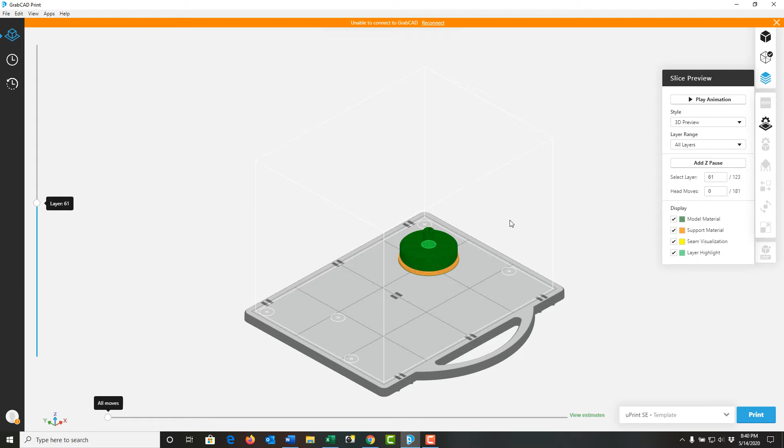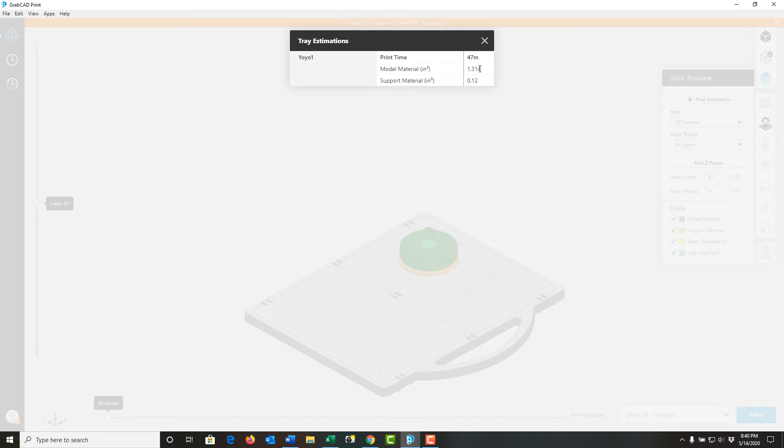To print one part with this orientation will take 47 minutes. Use 1.314 of model material, and we would expect the model material regardless of orientation to remain the same. And in this orientation we use 0.12 cubic inches of support. So I'll close this and I'll stop the layer preview.

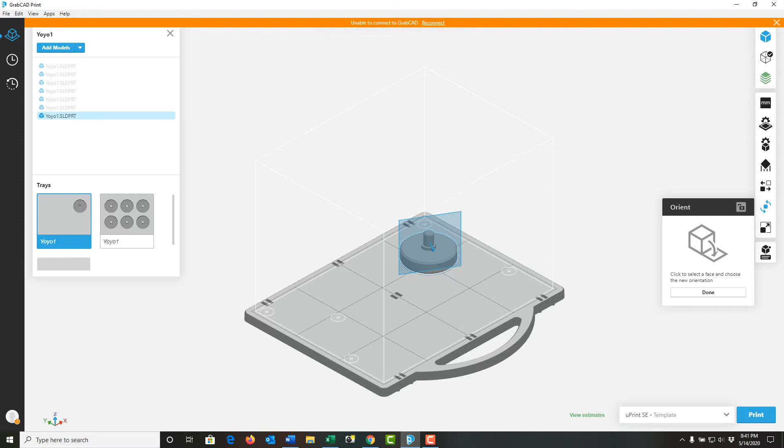And now we want to look at different ways to orient the part. So I'm going to select the orientation and I'll select my part, and next I'm going to tell it to orient a face to the plane. So I'll select this option, and as I move over the part you'll notice how the plane changes. So first I'm just going to select this face and flip the part upside down. So I'm going to tell it the selected face and plane will become the bottom. Next I'll tell it I'm done.

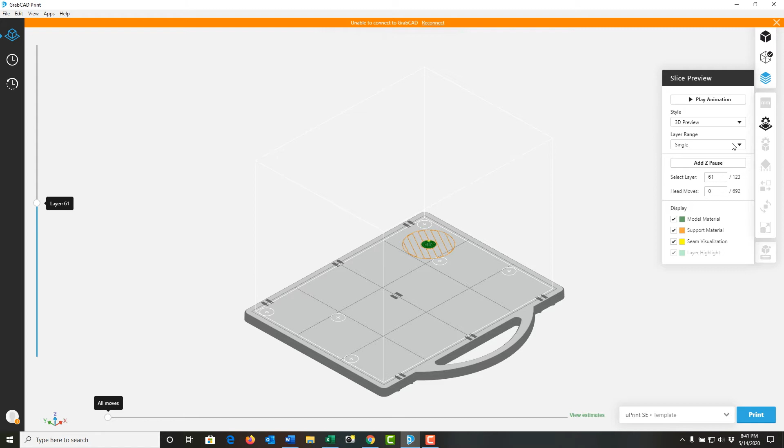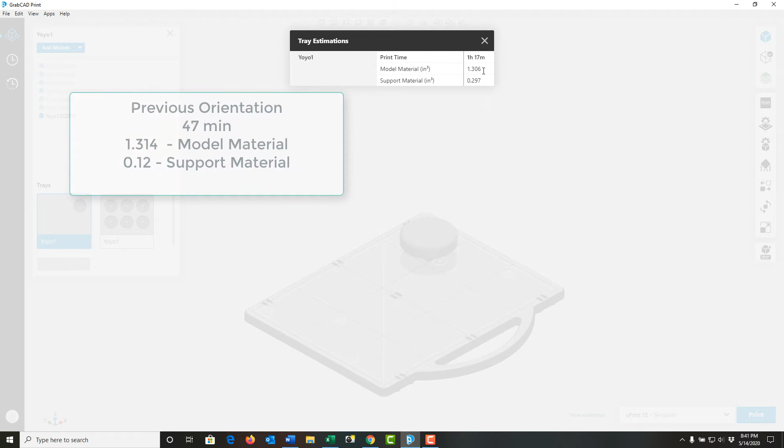And again, I'm going to slice this. Again, we'll look at all the layers. So we can see all the support here, and we can also see how it tapers out as it builds up to the bottom. We can turn the slice preview off. And again, let's look at the estimate. So now it's become 1 hour and 17 minutes. Uses 1.306 of model material and has 0.297 support. I'll close this.

And we'll continue to look at a few orientation options here. So I'll go back to Orient. I'll select my part. So again, I can reset the orientation to what it was. I can tell it to auto orient, or I can orient a face to the plane.

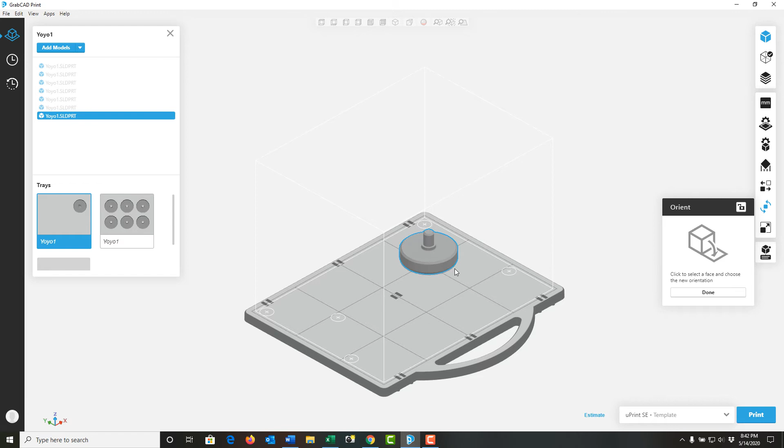So I can come out here and I can say orient that face to the front plane, and all it does is rotate it. Or if I come out here and select that again and orient that to the top, then the part is set this way. Just rotate around here by holding my right mouse button, and so now I can see the orientation. I'm going to accept that. I'll shut off the orientation, and once again I'll slice it.

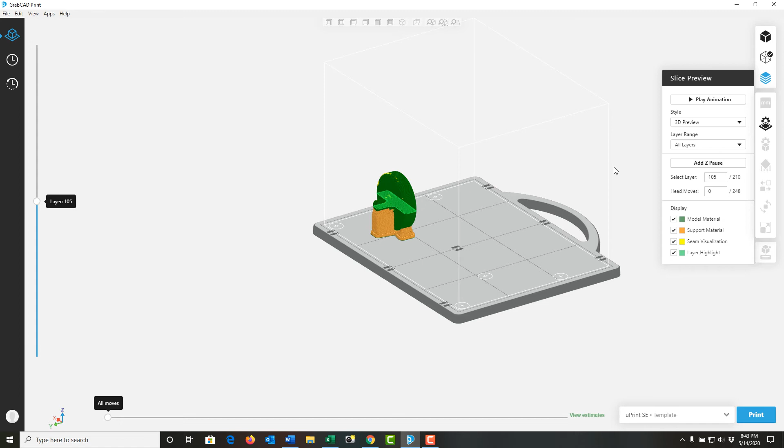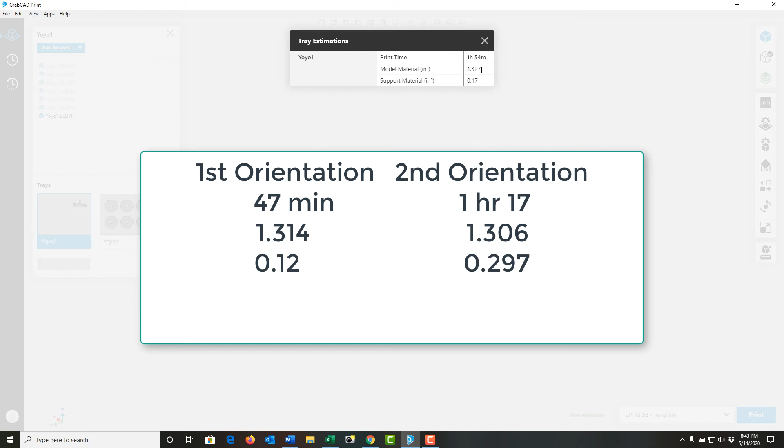And again I'll look at all of the layers, and here we can see the support. I'm going to turn off the slice preview, and again let's look at our estimate this time. So now the part will take 1 hour and 54 minutes, uses 1.327 cubic inches of material and 0.17 cubic inches of support. I'm going to close this, and I'm going to go back to the orientation options.

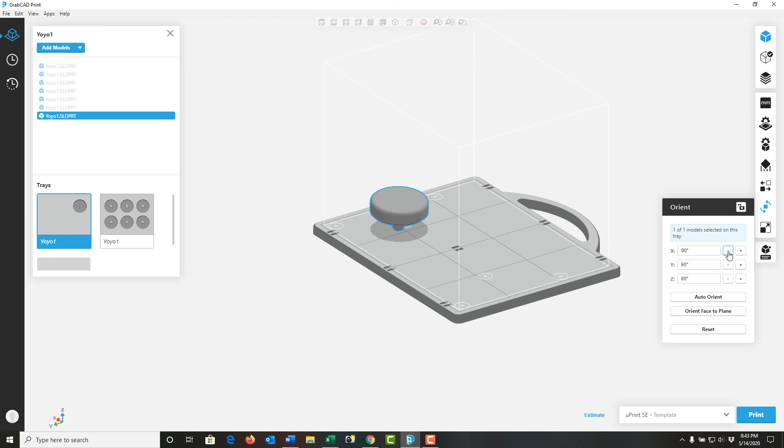Once again I'm going to select my part. The other way I can orient it is I can set an angular increment here. So I can rotate it about the X, and here we see our triad. So if I tell it to rotate in the negative direction around the X, this will happen. This will be the positive. Or I could do it about the Y.

I can also change the increment. So if I put in 45 degrees, we can see the effect. And I can rotate it about the Z. So with it rotated this way, I'm going to save that, and I'm going to slice it.

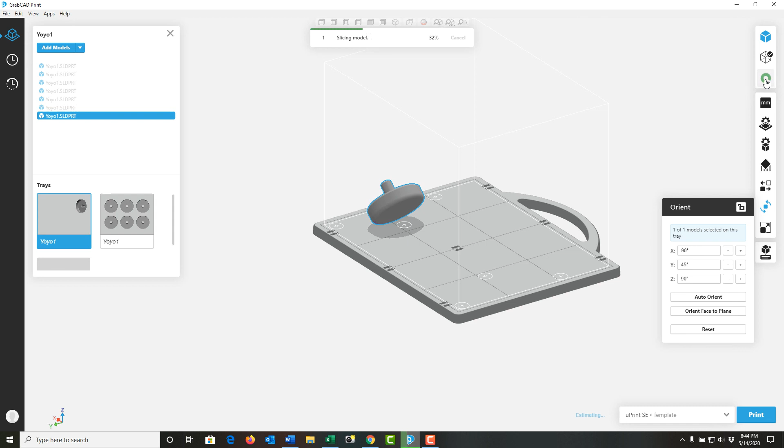Once again, I'm going to show all layers. And here, I'll rotate around so we have a better view. And again, you can see the effect it has on support and material. I'm going to close the slice, and I'm going to view the estimates.

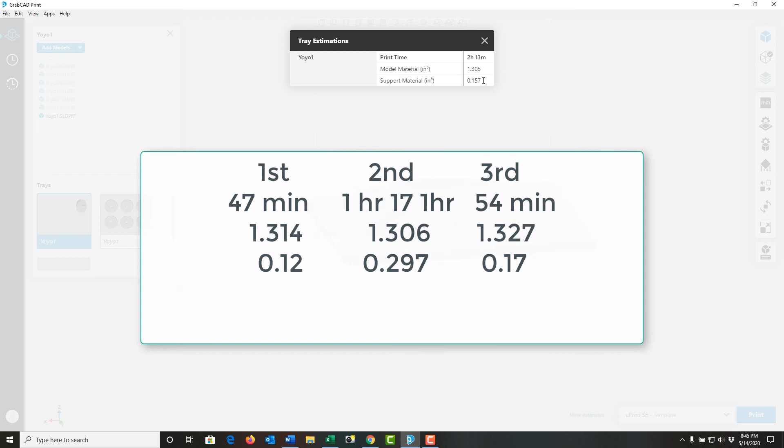And now, the print job will take 2 hours and 13 minutes, uses 1.305 cubic inches of material and 0.157 cubic inches of support. So I'll close that, and I'm going to save this in this orientation, and that ends this week's labs.